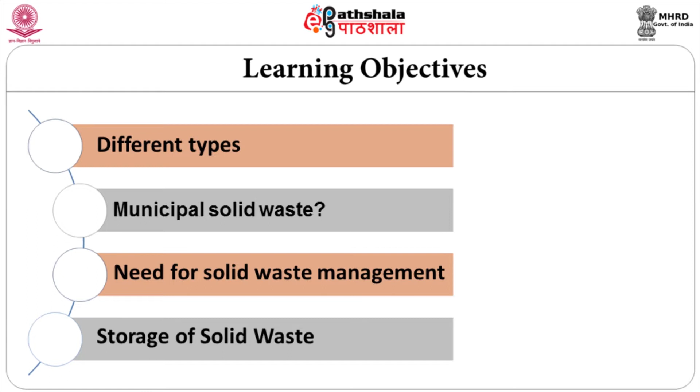In the Indian situation, since we are located in a tropical country, biodegradable waste undergoes decomposition very fast. So we can't permit it to be stored for more than a day, and the waste needs to be collected as quickly as possible. There are several aspects to be considered when planning waste storage, which is an essential requirement pertaining to different elements of waste management.

The different aspects to be considered when choosing a container for waste storage are listed here. The first issue is the type of waste, which depends on how we plan to segregate. For example, if you have biodegradable and non-biodegradable waste separately, you need two containers. The biodegradable waste should necessarily be stored in a closed container to prevent access to flies, vectors and other things. The recyclable waste like paper and plastics need not be in a container with a lid, but the biodegradable waste should be.

Next is the size of the container. At a household level, we already know the waste generation rate and how much of it is biodegradable. For example, in the Indian situation, about half a kg of waste is generated by an Indian citizen every day, of which about 50% can be taken as biodegradable. Depending on the number of people and the duration of storage, we can decide the required volume of the container. Roughly 7 to 10 liter capacity containers would be adequate to store our waste.

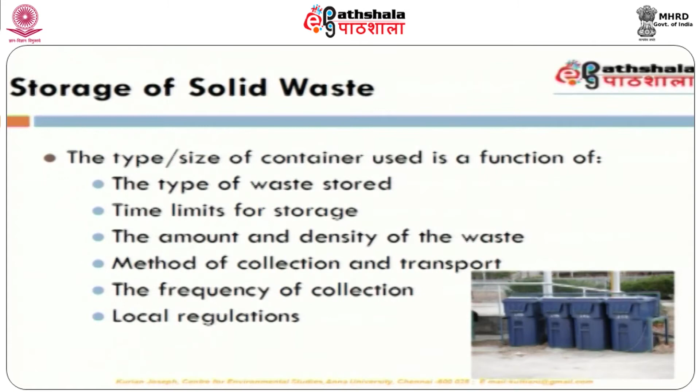The point to keep in mind is that waste needs to be stored at the point of generation, and collected from the place of storage, with no littering in between. Especially when we consider multi-story buildings, since this course is also focusing on multi-story or high-rise buildings, an important aspect to consider is how we handle the waste generated in very high-rise buildings.

One practice commonly done is to use a chute at each floor level and permit waste generators to dump the waste through the chute. Of late, people are not advising such a thing, because in high rise buildings, throwing waste through a chute many times causes noise problems, and the bags get torn causing unhygienic conditions, and there is also possibility of fire hazard.

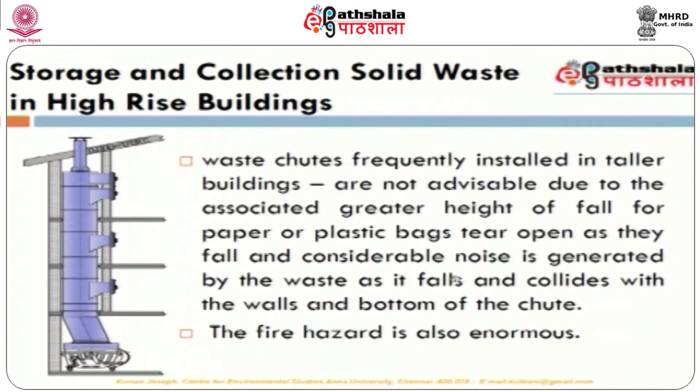So what is now recommended is that at each floor level you may have common storage containers, and the inhabitants could be advised to take their waste to such containers. There could be a separate access to take these containers to the basement where further sorting and processing could take place.

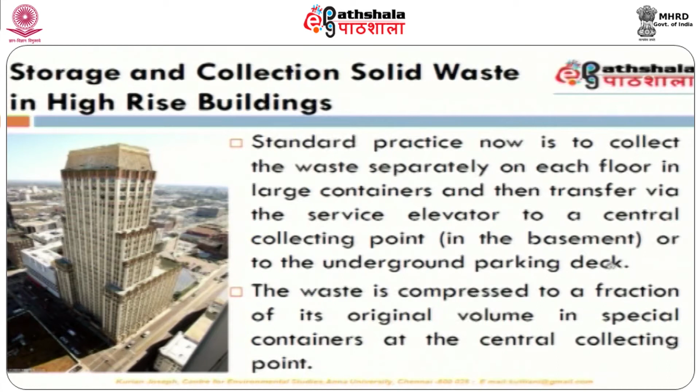Having stored and collected the waste, we need to think about processing of the waste. Broadly there are two routes possible for processing: one is the biological route and another is the thermal route. In both there are different technological options available, and it primarily depends on whether you are doing the processing in the presence of oxygen or in the absence of oxygen.

For example, if you take the biological route, we have composting as the most prominent option, which is an aerobic process where in the presence of oxygen we degrade the waste using naturally occurring aerobic microorganisms, supplementing the required level of oxygen and water, and finally producing a humus-like product called compost, which could be used as a soil conditioner.

Another option available is anaerobic digestion, where in the absence of oxygen, again using naturally available microorganisms and by controlling the necessary conditions, we produce especially biogas, and the residue can be further composted.

The third option is to carry out the anaerobic decomposition process in the landfill itself, called the bioreactor landfill. But as per Indian legislations, the bioreactor landfill is not permitted, so we need to opt for composting or anaerobic digestion, details of which we see in subsequent slides.

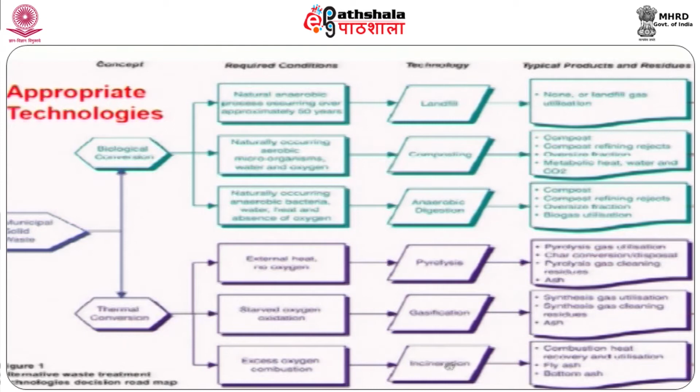In the thermal route, there are three options: incineration, gasification and pyrolysis. Incineration happens in the presence of excess oxygen, whereas pyrolysis happens in the absence of oxygen. Gasification is somewhat in between. At a commercial level, incineration is the most common practice in the thermal route, but for this, the waste composition and characteristics have to be carefully looked into.

For the Indian situation, if you look at appropriate technologies, composting comes as the best option because it can handle different kinds of waste. Even if it is in mixed form, composting will take place. Only the quality of the product will get affected.

Biomethanation can be considered only if you have highly homogeneous, organic and easily biodegradable waste. For example, kitchen waste, hotel waste, mess waste, garden waste, vegetable market waste, or slaughterhouse waste - that kind of highly homogeneous and easily biodegradable waste - we can think of biomethanation. And if we have incinerable waste, any organic waste is incinerable, but it also depends on the moisture content.

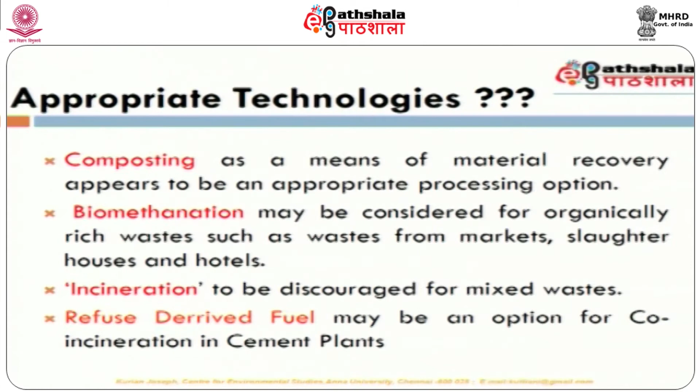If the moisture content is very high, then a lot of energy has to be spent on drying the waste, and then incineration will not be viable. But there will be a certain portion of waste which could be incinerable. So, for a large city, even incineration could be an option, but for small towns it will be a combination of composting and biomethanation as the appropriate technology in the Indian context.

Being the most appropriate technology, in practice for many years, let's look at the composting process. Since it is a biological process, it is applicable only for biodegradable waste, meaning segregated garbage ideally needs to be brought. There are different ways by which it could be composted, but mostly what is recommended is windrow composting, where we heap the waste in the form of windrows and then turn the waste over a period of time.

During this time, the waste decomposition takes place naturally, but there are several essential conditions that need to be maintained - primarily moisture, oxygen, and water content. To enhance this process faster, we also prepare the waste by reducing its size, adjusting the carbon to nitrogen ratio, and initially enhancing the process by seeding the waste with selected microorganisms.

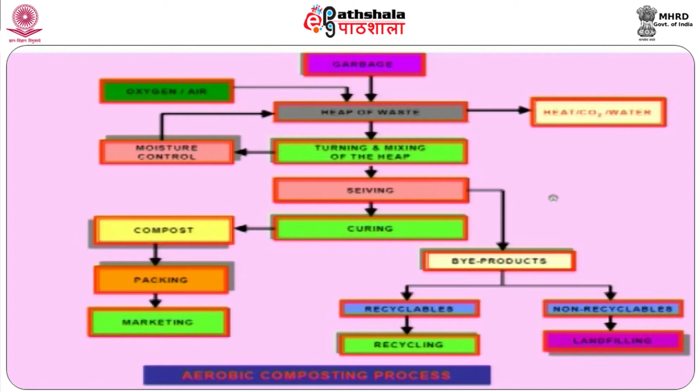Then you do the sieving to separate the decomposed waste. Slow decomposition can be permitted for another 3 months, called curing. After curing, we get the compost which could be packed and marketed. The residues from the screening process, if non-biodegradable, can be checked for recyclable components, which can be recycled, while non-recyclable components or inerts need to be landfilled. This is what typically happens in a composting process.

We can also use earthworms to support some of these activities, and when we do, we call such composting vermicomposting, where the earthworms help by grinding the waste. This helps in size reduction as they eat, grind, and then excrete - a mechanical grinding process that achieves size reduction.

Similarly, when the earthworms pass through the heap, it helps in aeration. Thirdly, when the earthworms excrete, they also excrete a lot of microorganisms from their guts, which acts as seeding. So, to some extent, earthworms could help meet some of the requirements for composting and can enhance the process.

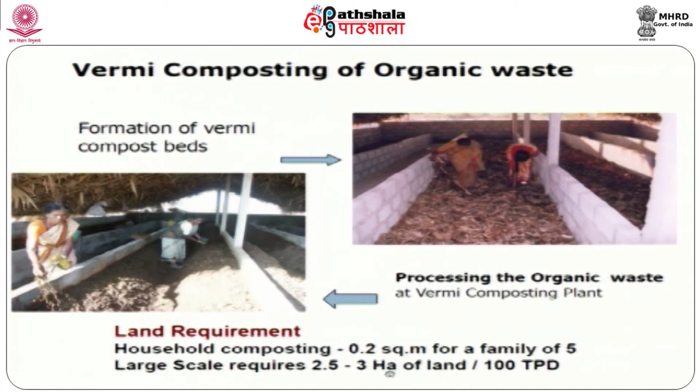About 0.2 square meters of space is adequate to set up an earthworm or vermicompost pit for a family of 5, and for large plants we require about 2.5 to 3 hectares of land for a plant capacity of about 100 tons per day.

It is also advisable to have vermicomposting systems developed for apartments or high-rise buildings. One simple approach is to develop connected tanks, or a brick tank as seen here, divided into 4 parts, so that in one part feeding takes place, in another composting takes place, and in another curing takes place. The tank is divided by compartments with openings, and the earthworms will slowly move between them, so we need not change the earthworms.

Otherwise, we also need to separate the earthworms when composting in heaps, and during that process there is a possibility that the earthworms may get killed. So, this is one typical model recommended at the apartment level.

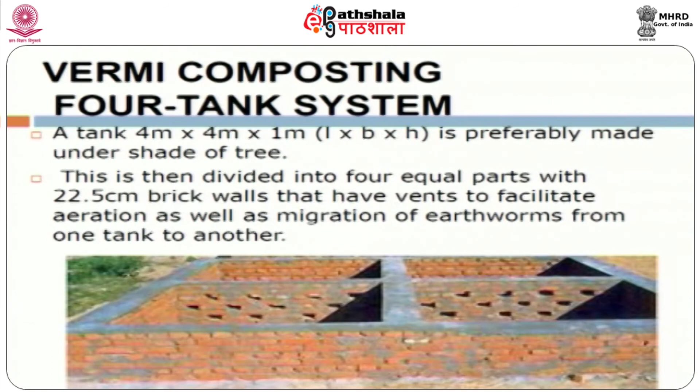But it is most important that the compost we produce meets certain quality requirements. First, it should be mature, meaning there shall not be any issues like odor, fly nuisance, or rat nuisance as discussed earlier regarding biodegradable waste. That should not happen, which means it should stabilize.

Second, it should be free of heavy metals. If you mix household hazardous waste, especially batteries and similar substances, with the waste and then compost it, the organic matter gets decomposed, but the hazardous substances will leach out and contaminate the compost. There are standards prescribed for different heavy metals, so ideally such substances should not be included in the waste.

Then there are the nutrients, which will be of interest to the farmer. Though the waste as such doesn't have adequate nutrients when composted, it is possible to supplement it once composting is over, and we can provide the farmer with manure that is a good soil conditioner and also has adequate nutrients.

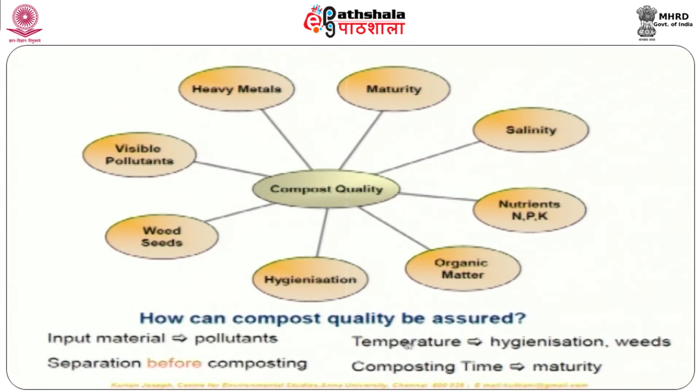Then there's hygienization, which makes the waste free from pathogens and weed seeds. This happens automatically if you maintain a temperature of 60 to 70 degrees, which naturally occurs for at least one day. These are controlled by input control, especially source segregation, which is very important. The composting time ensures maturity, and the temperature ensures hygienization and killing of the weeds.

Now let us look at the second option, biomethanation of waste, which is applicable for highly homogeneous and biodegradable waste. Again, not all waste can be degraded; we need to separate the non-biodegradable waste. The mostly biodegradable waste needs to be shredded, meaning crushed or size-reduced.

Then it has to be converted into slurry by mixing it with water. Ideally we should have about 10% solids concentration, meaning 90% water and 10% solids. Once made into slurry, you keep it in a tank along with the required microorganisms.

Initially, cow dung is normally used as a mixture to supplement the microorganisms, and once the process starts, the microorganisms remain in the system and the process continues. In about 30 days time, the biodegradable waste gets converted into biogas, during which a 4-stage process happens.

Initially, the complex waste, mainly carbohydrates, proteins, and lipids, is converted into simple organic molecules by hydrolysis. Then that is converted into organic acids, and further converted into methane by a group of organisms. This means that compared to composting, we need better control in terms of absence of oxygen, because such organisms don't operate in the presence of oxygen, so it has to be completely anaerobic conditions.

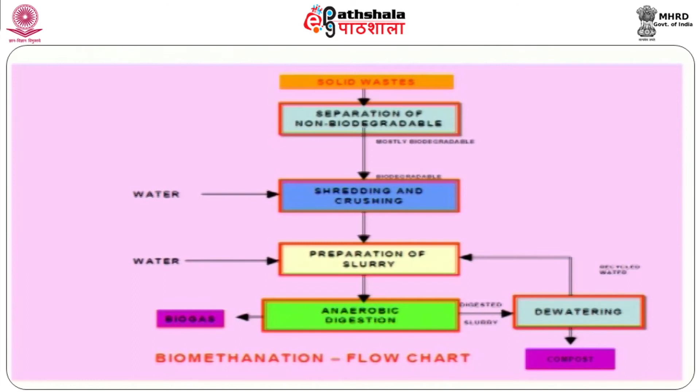But the most important thing is the feed quality has to be very good. There are experiences where large biomethanation plants were set up for mixed waste, and the plant failed because of the large inert content. So it is to be kept in mind that if you are considering biomethanation as an option, the waste has to be highly segregated, homogeneous, and highly biodegradable in nature.

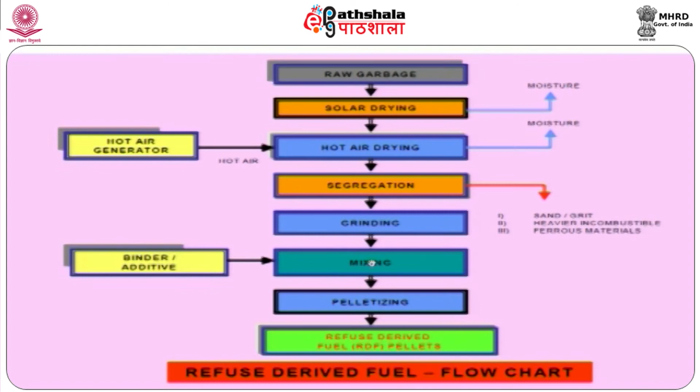Now the third option available for waste management is the thermal route, that is incineration. Ideally the incinerable components with high calorific value, in the form of paper, wood or plastics, need to be separated and dried. They can also be converted into fuel pellets by compacting, or even without compacting they can be used as fluff and mixed with other organic materials if the quantity is not adequate, then burned in a boiler and the energy used again for electricity requirements.

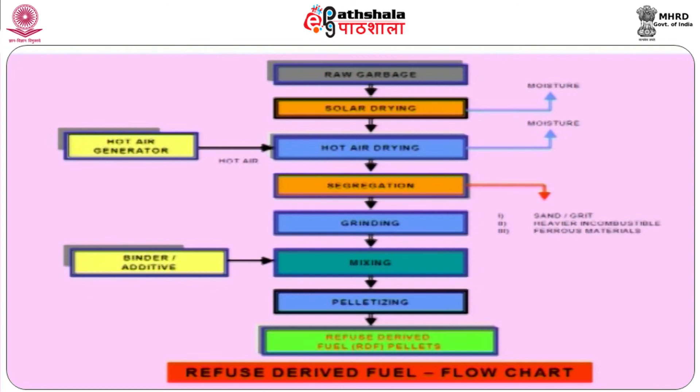This is practiced, but it is not very common in the Indian context because of the poor quantity of the incinerable fraction of waste, the high moisture content, high inert content, and low calorific value of our waste. These are some constraints in using this technology, but for large cities where even 20% of the waste would be adequate to set up an incinerator, such a facility could also be considered as part of an integrated waste management system.

Now we will focus on the last element of waste management, which is the disposal of residues. As per our Indian legislations, we are supposed to dispose only the inerts or residues that come from waste processing, which has to be done in a landfill, an engineered structure for long term storage. Long term storage means landfills are normally planned for about 20 to 25 years of life.

So we should quantify the extent of waste that will come during that period, then identify a place depending upon the density in a landfill. We can compact the waste to about 800 kg per cubic meter, reducing the volume and requiring less space, but since the storage is for a long period, we will require an extensive area. For example, a city like Chennai may require about 100 to 200 hectares of land depending upon the depth at which the filling is planned, and the site has to be suitable for this activity.

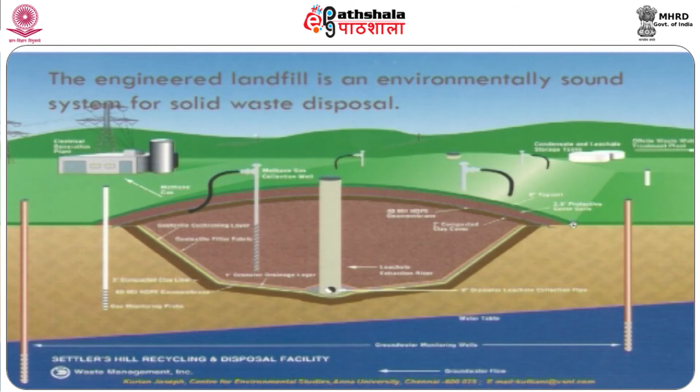There also needs to be an environmental monitoring system with monitoring wells both upstream and downstream, and other environmental monitoring for air quality. There should also be a surface drainage system, because it is a large area, and if rainfall occurs, the water needs to be properly drained, otherwise it will lead to floods. Similarly, water from other areas should not flow into this area. So the surface water drainage system is also an essential component.

So if you make an engineered structure taking into account all these components, looking like a hill of waste constructed over a period of time, that is what is expected as the final destination for the ultimate disposal of the waste.

Of course, a landfill is a permanent headache because it's long-time storage, and there are two issues. One is the leachate that will be generated. Even if we provide the liner system with specifications, and even if we put a cover system which minimizes the entry of water, the waste itself will undergo decomposition, and there is possibility of generation of leachate, which is a highly concentrated wastewater that needs to be managed.

And if there is biodegradable waste, then landfill gas will also be generated, which also needs to be managed. Normally it is expected that this process will go on for another 30-40 years. So a landfill, during its construction and operation, will take one generation, about 30 years, and then its monitoring will go on for another 30 years.

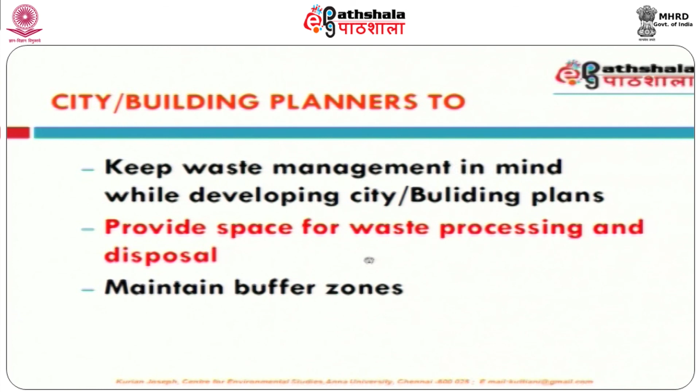For a manager, a planner, city planner or building planner, it is essential to take into account waste management as an activity that should take place throughout the operation of a city or facility, and to provide for waste storage and processing facilities, which is one main constraint, while also ensuring minimum buffer zones are maintained. First it has to be planned, and then such buffer zones need to be planned, and the occupiers also need to play several roles, especially as the public.

Primarily they should practice source reduction, source segregation and source level recycling. They should stop littering public places and streets. They should pay for waste management - especially waste collection and processing, which requires money that has to be paid by waste generators. There is also a need for waste generators to cooperate with municipal authorities to identify places and demand for waste processing in an environmentally friendly manner.